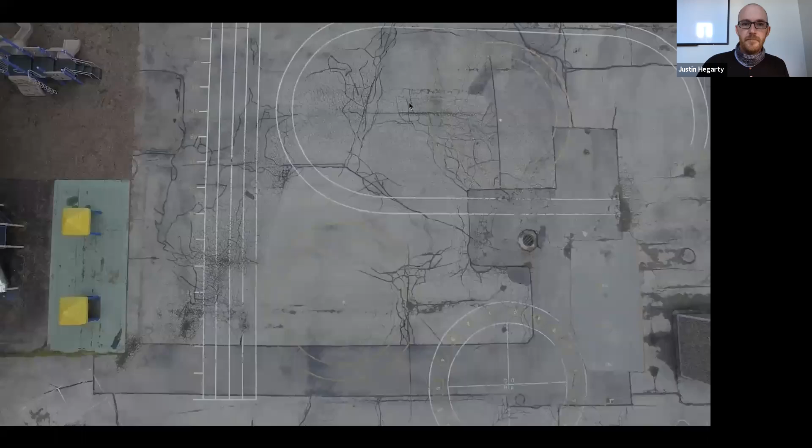Many Milwaukee area schoolyards are in poor condition and offer little, if any, green space. Schoolyards were originally paved to reduce lawn maintenance costs, but decades of inertia have left deteriorating infrastructure that is costly to repair and impairs the environmental health of our city and the social emotional health of our children. The redevelopment process begins with schools applying to receive conceptual planning support provided by Reflo and the Milwaukee Metropolitan Sewerage District. Each year, 5 schools are awarded the planning grant based on their need and enthusiasm for a greener, healthier schoolyard. The year-long planning process consists of monthly Green Team meetings that culminate in the development of a conceptual plan document well supported by the school community, administration, and project partners.

Schools spent over a year fundraising with support from the school district, project partners, and community. School districts hire engineering consultants to create the necessary detailed designs before construction can begin in the summer of the third year of the process.

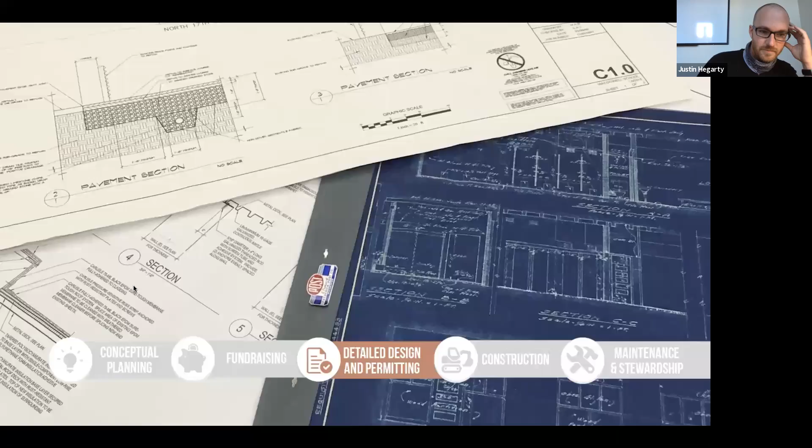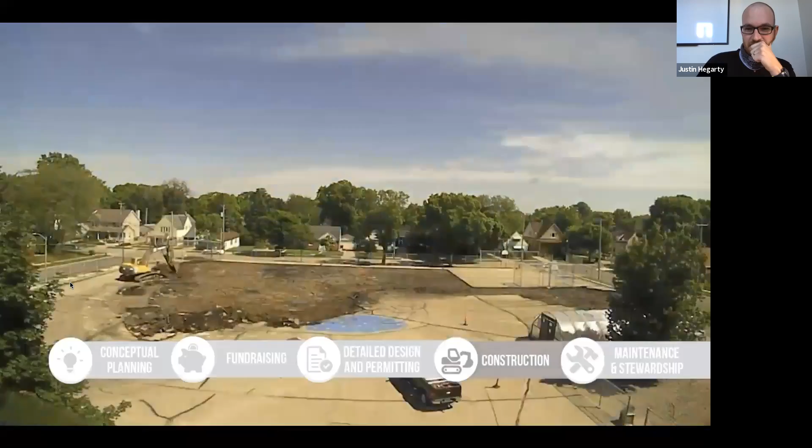I am not going to litter because water carries trash down hills into the river or lake. I'm going to remind my family that our choices affect more than just ourselves. Everything is connected.

These projects don't only help our schools receive a new and better playground, they're also helping the environment and making a positive change in our community.

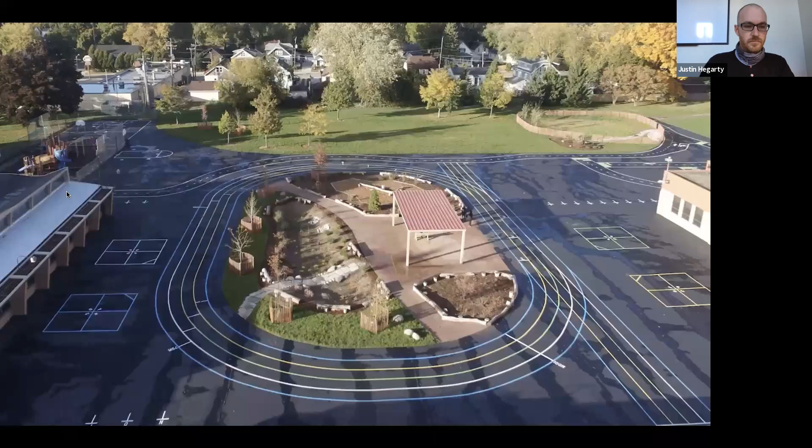An increasing body of research underscores that students' access to green schoolyards can result in better academic outcomes, increased engagement and enthusiasm, improved social emotional skills, and decreased childhood obesity. Redeveloped schoolyards also offer many other benefits, including improved stormwater management, urban biodiversity, community engagement, and meaningful STEAM curricular connections.

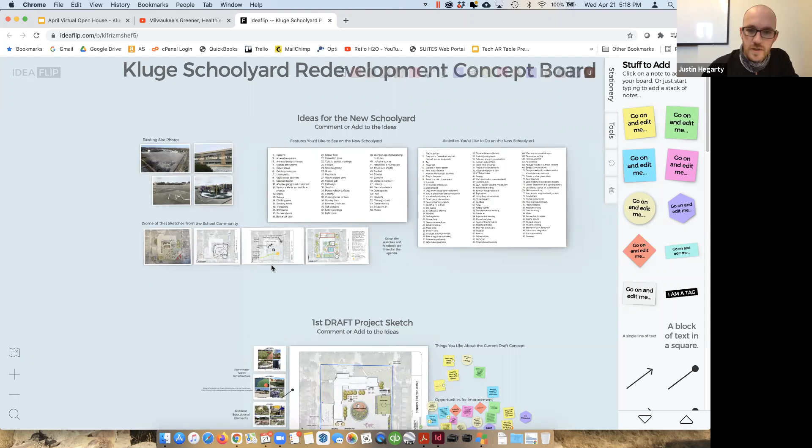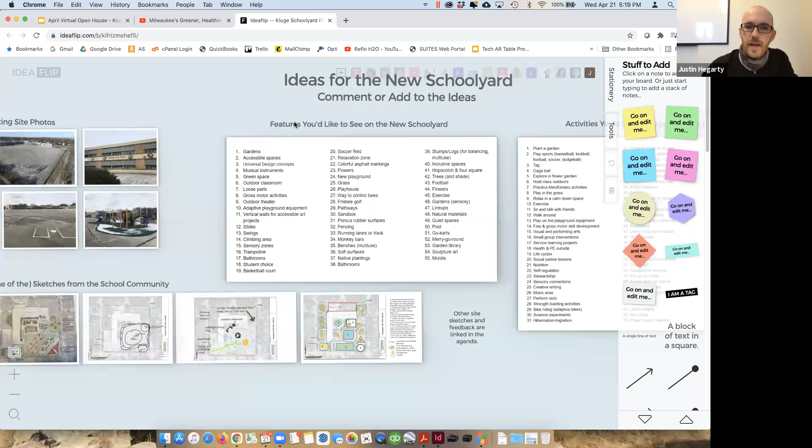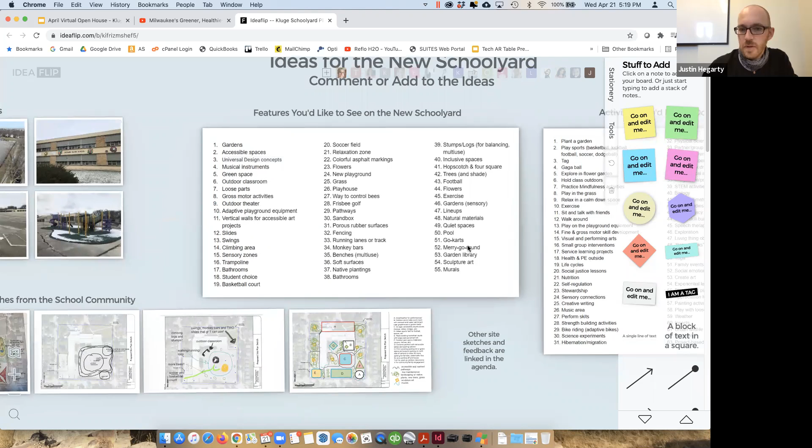Up at the top here, we have what was from the original schoolyard redevelopment surveys. We had asked the Kluge community to communicate what they would like to see on the new schoolyard. There are some really great thoughts about gardens, loose parts, murals. I won't go through all of these, but there are some really great ideas out there.

We also got some solid responses about activities that you'd like to do on the school grounds, and we heard from students and adults. This is really helpful to help build out what kind of features and what kind of activities we can do to help support what you'd like to see on the school grounds.

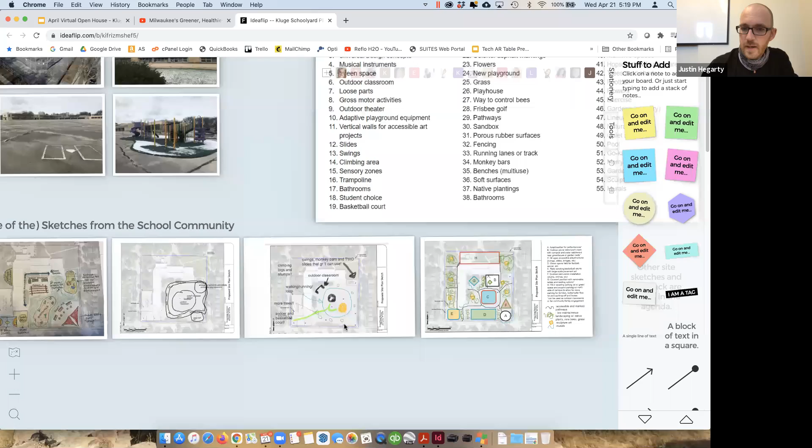So we did that, and we also got some sketches which were really helpful as well. And then for those that were part of the school green team last month, we had a first draft put together. We had some precedents, like images that represent similar concepts, and we got a lot of good feedback on that.

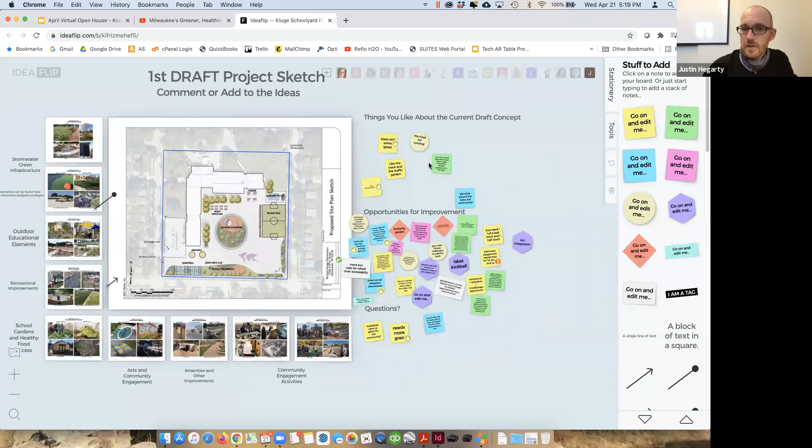And then today we have the second draft. So we took that feedback and we made some revisions over the course of the past month. And today we want to just take a look at what that plan is saying.

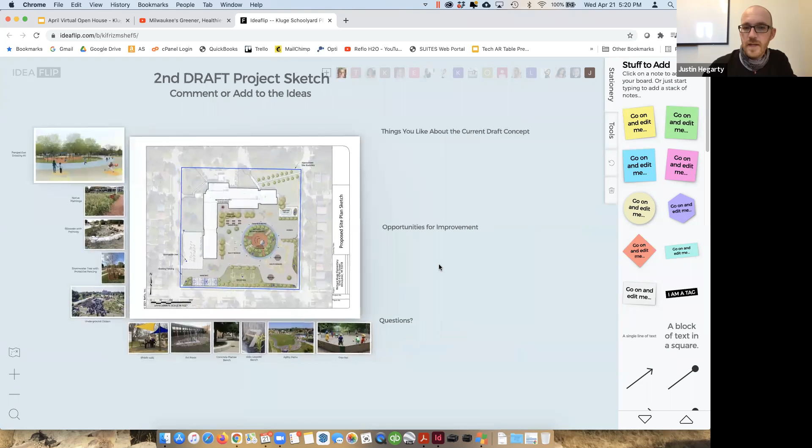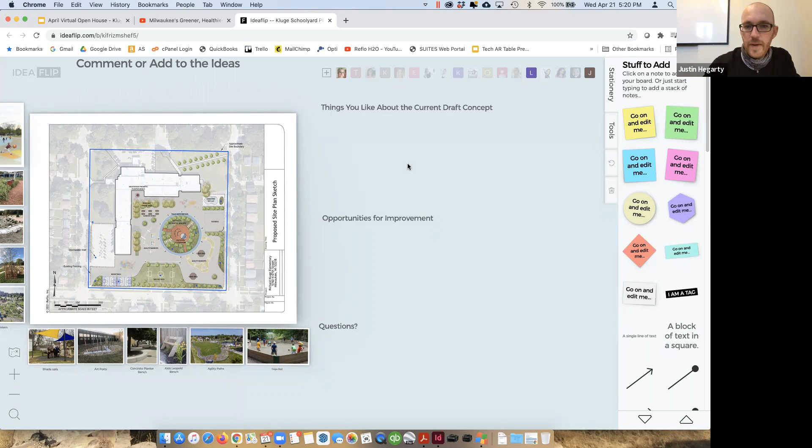And then we're going to go through the same prompts. I'll come back to these, but I just want to introduce them. One, what are the things that we like about the current plan? Two, what are the opportunities for improvement? And three, what questions are out there, so that we can work on that and get back if anyone has thoughts or questions about what's going on. But we'll come back to those three prompts in a moment.

Again, Lisa did drop that link in the chat, so if anyone wants to follow along in this platform, you can do that. But I'm going to ask Elise from Community Design Solutions to walk us through some of the updates to the conceptual plan—again, second draft—and we'll go from there.

Yeah, hi everybody. So lots of updates have been made. Some things have been moved around, but some things have stayed the same, like that center track circle classroom area. But now it's been a little bit more detailed and designed as well.

So we've got lots of space for an outdoor classroom with shading, trees all around it, an additional art post and decorative benches into that grass area to the north, so you can spill out seating as well, and have other little areas for interaction and hanging out within this center space. Trees are all around it, and we've got a track with meters going around it as well.

And then to the left and right, we've extended out some agility markers, similar to the ones we saw from last time we met, copying that same style and creating more ways to wind through the space, with gaga ball pits to the right. Another major move was switching the kickball soccer field area—I know it used to be more to the north, but we've positioned it more to the south. Again, lots of trees surrounding it, with bioswales to the right.

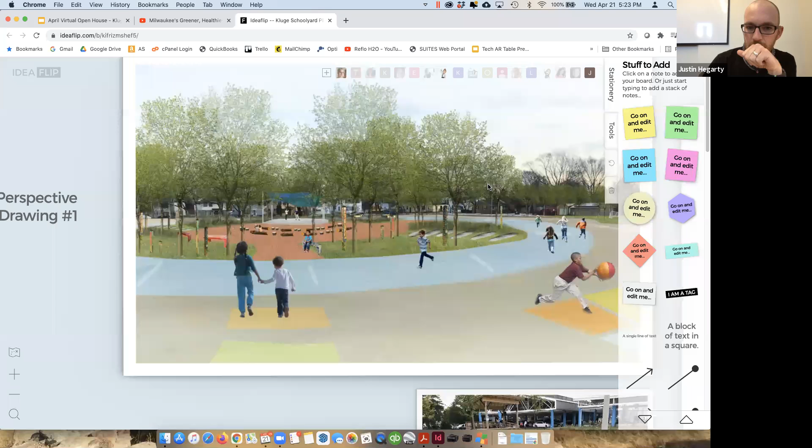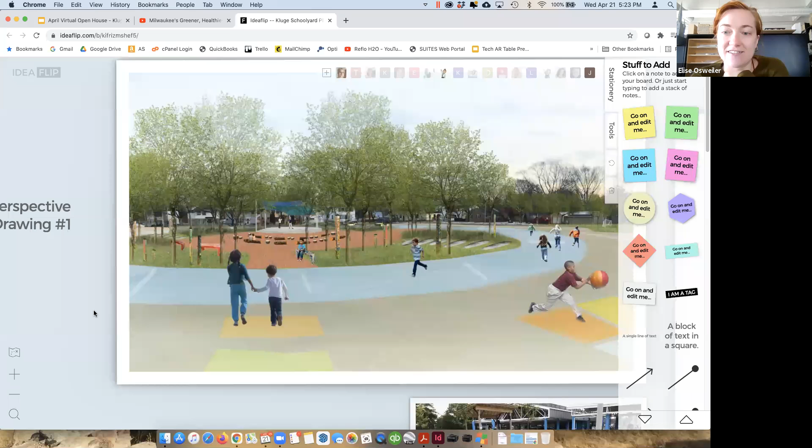This is a first perspective drawing of that center outdoor classroom space. You're positioned on some of these agility paths looking directly into the space, the path that you would take, or one of many paths into the center space. You can see some of those art posts and benches around as well, log seating for the theater space with lots of shading and trees. There's some children playing to the right, and you can see the soccer fields and Gaga ball pits way in the distance.

So as Justin said, there'll be multiple renderings so we can highlight different spaces throughout. I think another good conversation point is what other spaces do you want to see rendered out and have more detail.

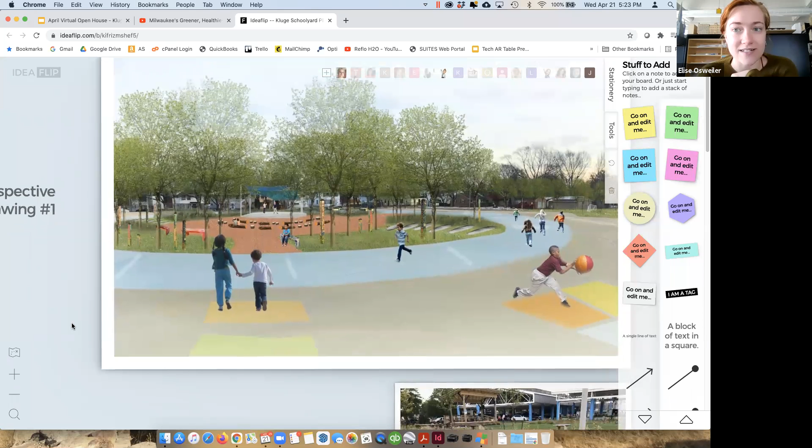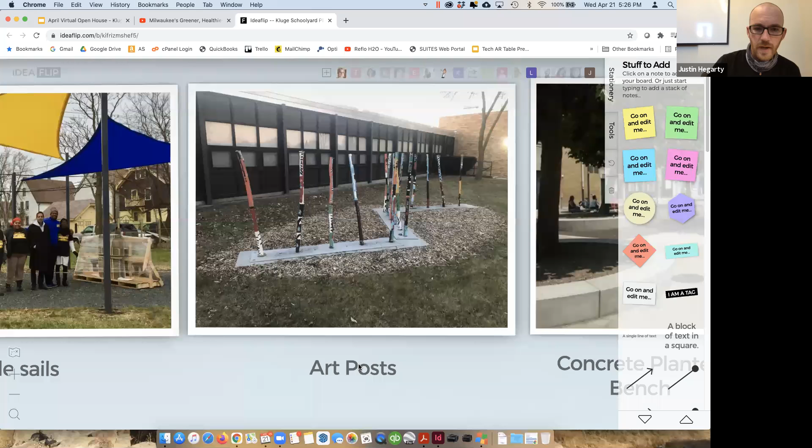Elise mentioned art posts. This is an example from the Academy of Accelerated Learning that serves as an opportunity to have decorative posts. It could be different features if we want to explore different sculptural elements or types of arts programming. We can certainly talk about that and include it in the plans as well. We want to make sure we're representing Kluge appropriately as a school for the arts, so we felt this could be a cool visual opportunity to accent the outdoor classroom area.

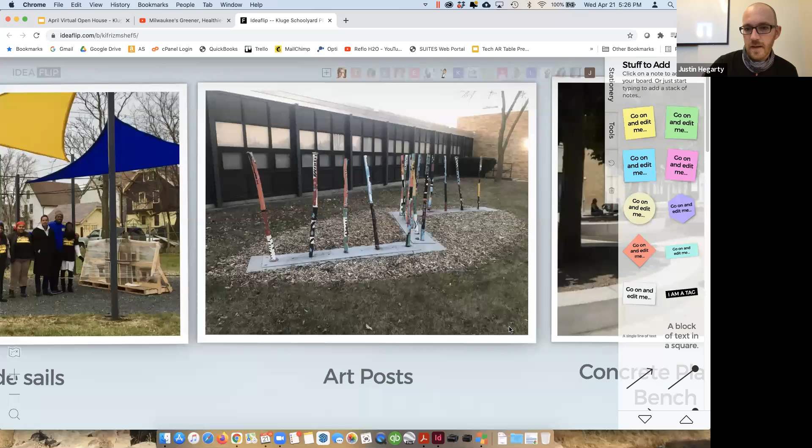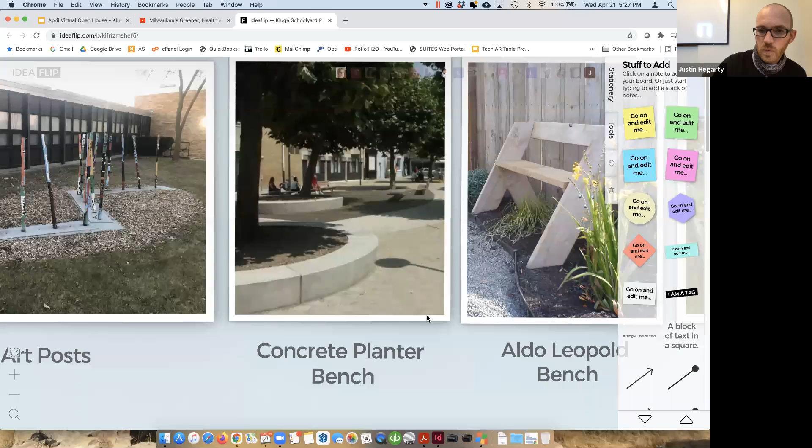And then we have these circular features that we're calling the concrete planter benches. These are opportunities to have benches on the school grounds that are really resilient and also act as a planter. What we're talking about with schools is also using this as an exhibit space, so maybe art activities can be planted, so to speak, inside of there. Different types of grasses could be planted underneath that canopy as well, but that's a strong visual.

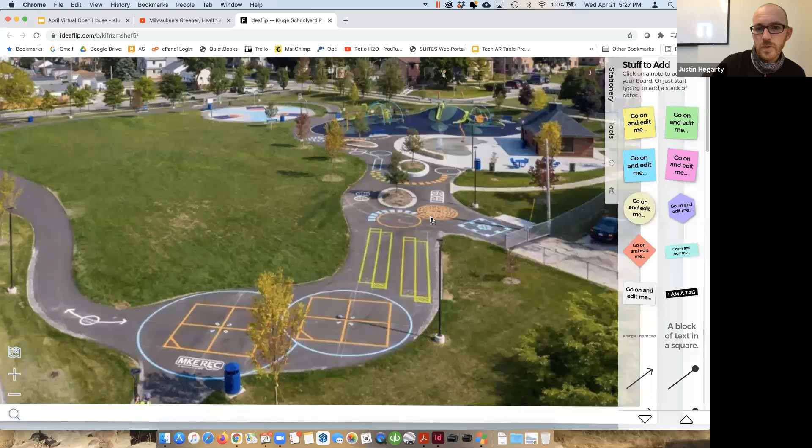Benches, and then I do want to zoom into the agility pathways as well. So when we do this, this is an example from MKE Rec.

There's opportunity for painted play that says hop, skip, and jump through different spaces. It's kind of a really intuitive activity for students to be able to play on the school grounds on this painted play. The sensory gardens, I see that in the chat.

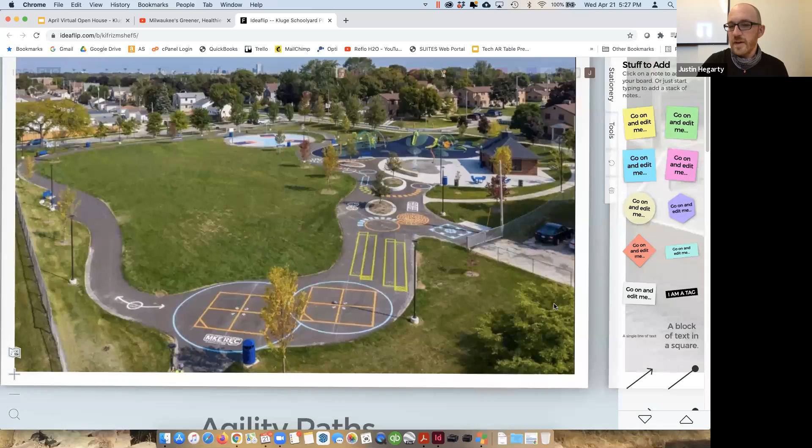We'll come back up to that one too. Gaga Ball, for those that aren't familiar, this is kind of a smaller scale dodgeball facility that helps support some gross motor activity that's a little less intensive than dodgeball, a little bit more inclusive. It's really popular amongst many students.

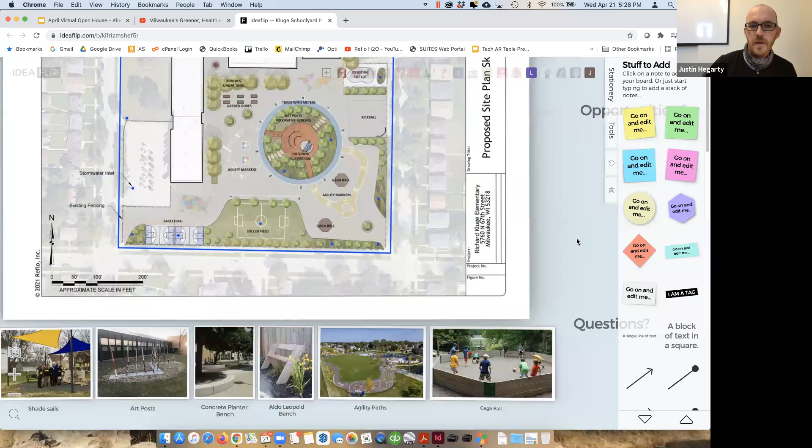Okay, so those are the precedents, those are some of the ideas. That link is in the chat, Lisa, if you wouldn't mind just dropping that one more time. So if anyone wants to respond to these prompts, again, we're looking for what you like about the current plan, what are opportunities for improvement, and what are some questions about that.

I'll show you real quick how to respond to these prompts. Once you get into it, on the right-hand side, there's stationery. If I just left click and drag these sticky notes, I can drag them into one of those three prompts, and I can double click it and then type in there and say, what do I like? I like the bioswales.

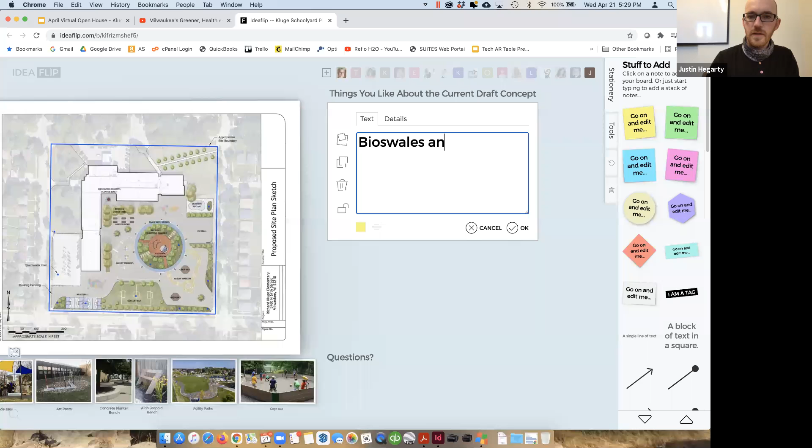Bioswales and walking paths. So one thing I'll say is in the details, we can see who made those comments. So if there are any questions, we can follow up appropriately with those individuals as well. But there it goes, and that's one of the ways to be able to respond to this.

The colors aren't going to matter for our purposes today, so you can get as creative as you'd like with whatever color post-it note.

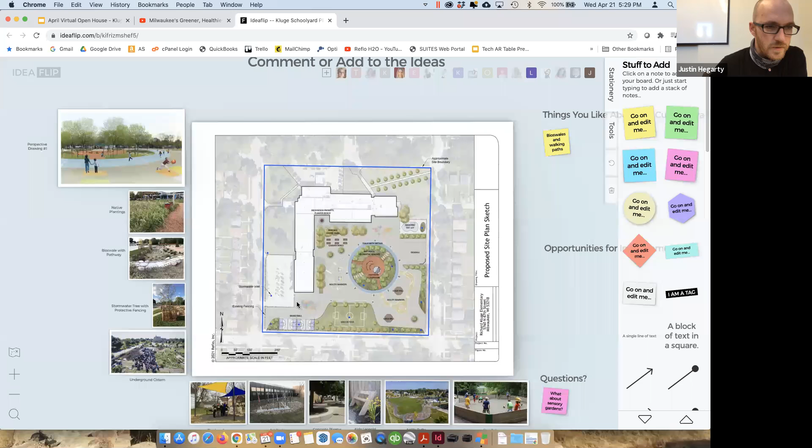And so Elise, would you want to respond to some of the sensory activities and some of the sensory play areas? I know we had talked about this corner in particular.

Yeah, so that back corner, I think, is another opportunity of where we talked about, because it is kind of a little bit more tucked away. It can create that meditation prompt, kind of that sensory activity. I think that, and all along where the garden boxes are in that whole space, could easily be turned into a really nice sensory garden, and places where you can walk and have that more mindful space. And then I also know we talked about if there were any more sensory activities that could happen back there.

I know other schools have talked about options as well, Justin, like lavender gardens, I think was one, if that's kind of what we're thinking about.

Yep, lavender. Some have done like painted on the asphalt labyrinths. Labyrinths are not mazes, they're like one way in and one way out, so you follow that pathway. That can be painted on the asphalt, or that could be built above it through different means as well, so if a labyrinth is of interest.

I also want to say that what's shown here in crushed red granite, that is all wheelchair accessible pathways. Also that kind of stage area for the outdoor classroom, we want to make sure that shows as having a ramp, so that would all be wheelchair accessible as well.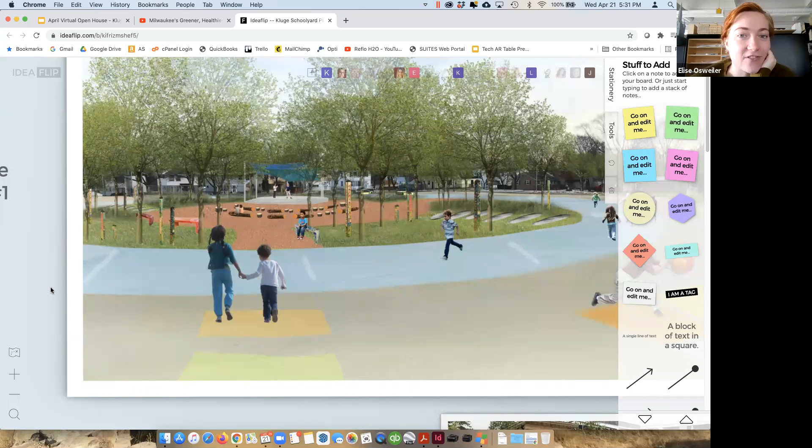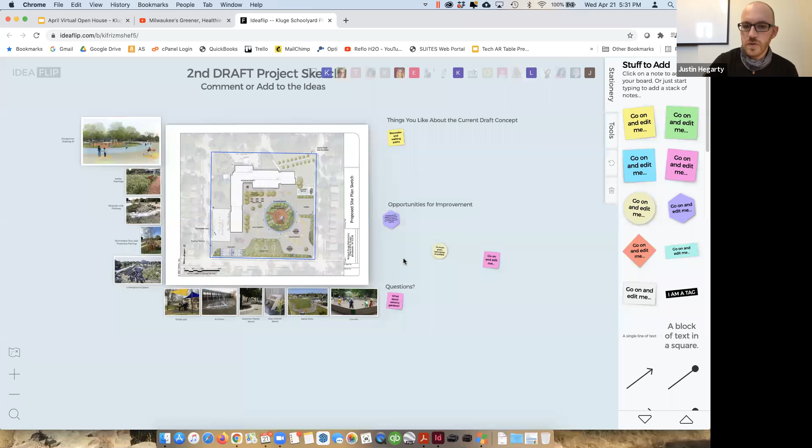Let's see some comments in the chat. And then we see some people populating the prompts here too. Any big thoughts that we want to chime in and just kind of hear those out with the big group? Does anyone want to unmute and just make some comments while others are responding via the board?

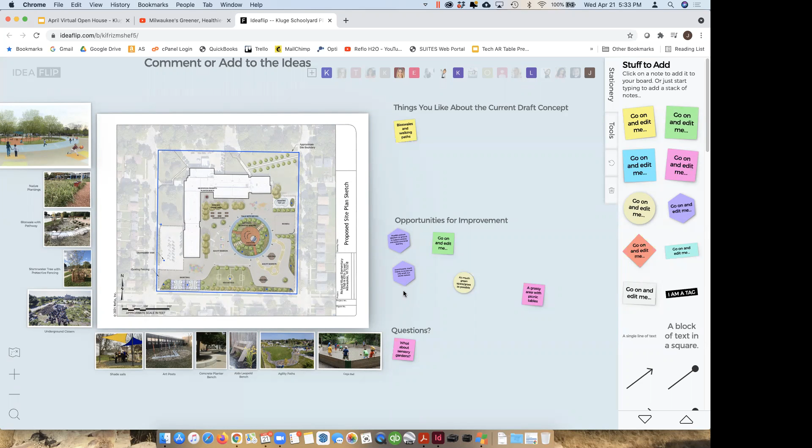I was just wondering if any trees are going to be added along the edging, maybe native pollinating trees that would bring some shade, but also by production have blooms and flowers, which would be another way to bring in butterflies, bees, and natural pollinators.

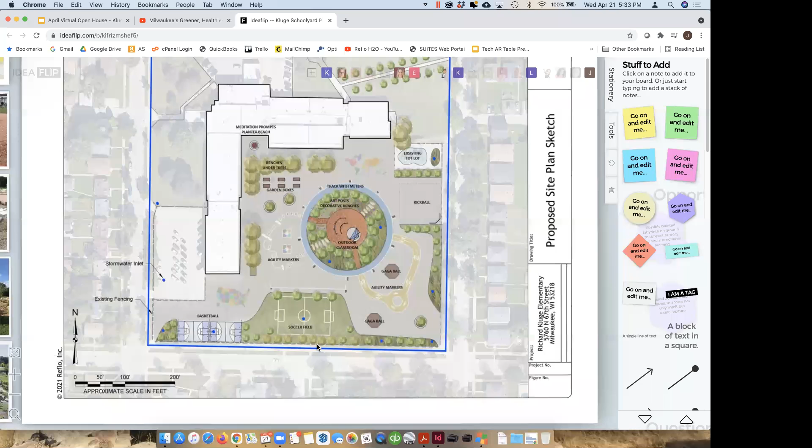Yeah, that's awesome. So Angeline Koch, who is the MPS sustainability specialist, is the project manager within MPS facilities that manages this project and the school projects. She's also a master gardener, and I think she'd have similar comments and ideas.

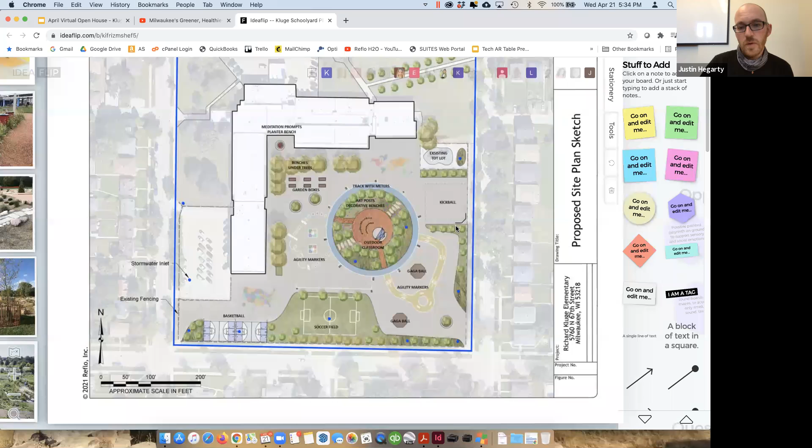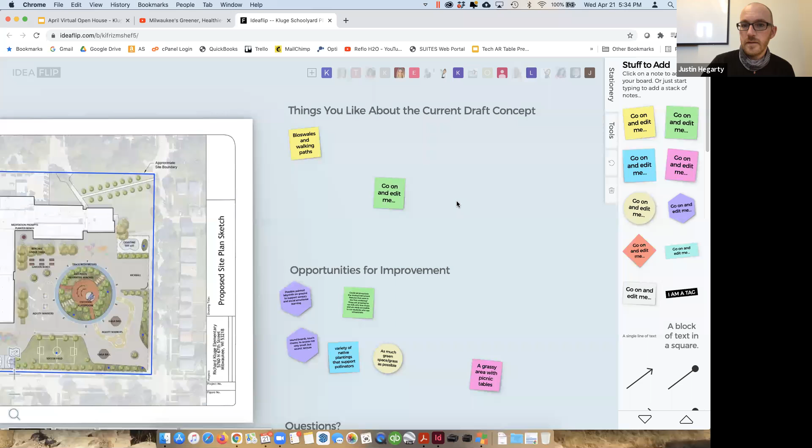And you guys were talking about planting a lot of different trees, so there's a lot of opportunity to explore different types of flowering trees. Some fruit bearing trees - on schools we've been a little more sensitive about making sure those are in corners or areas that can be separated from the rest of the space in case of allergies, like service berries in some cases. But if there's interest in exploring diversity in trees, I think that would be great to comment on, so we can provide more explanation of the opportunities on that front.

Sorry, I was having a little hard time with my sticky note. Do you want me to add it on there for you? That'd be great, if you wouldn't mind, that'd be awesome.

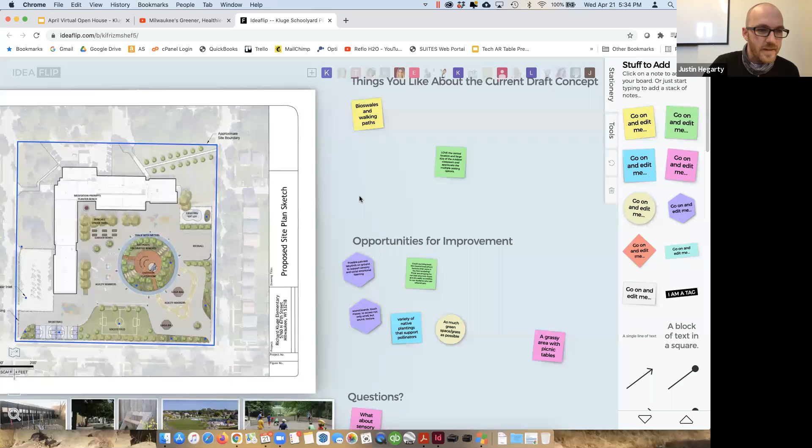Anyone else want to chime in and provide feedback on what we're looking at? In the chat, we're talking about different kinds of activity and sensory focused panels, like touch mazes and different tactile things, so there's more than just smells from the plants and flowers, but different sensory connections we can help bring to the students.

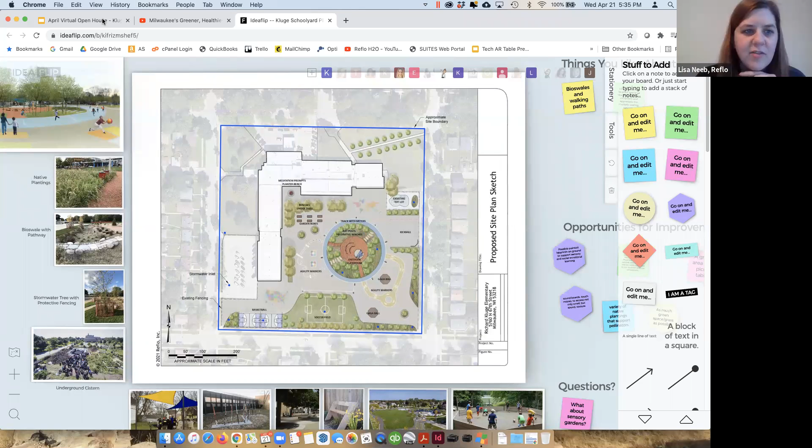Yeah, so for those that aren't familiar, just to describe that more - those are kind of like boards that you move things around, very tactile. I'm curious, from the Kluge team, would you prefer to have those by the younger ones up on the north side of the building, or where would those panels be most appropriate?

I'm going to allow other people to talk. Could that be something that maybe gets integrated into that grassy area just to the south of the tot lot there? Over here? Yeah.

That grass could probably be expanded a little too. I know we've got a little wiggle room with the kickball underneath, so that could become more of an actual usable space too, I think. And as far as the sensory gardens, or whatever you want to call them, they should be accessible to all grade levels, not necessarily by the tot lot though, because all grade levels won't be over there. Got it.

How do we feel about the meditation planter space in the corner? What do we call that, the wind tunnel? Well, that would be great, but it's hotter than heck in there in the summer. Yeah, or in the late afternoon.

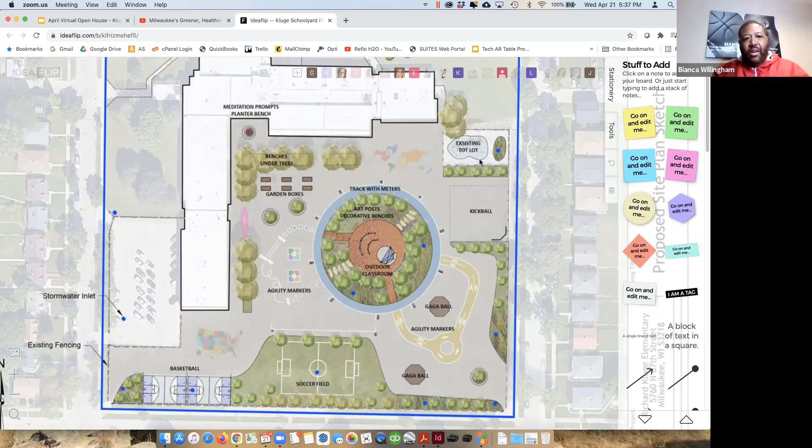So I didn't know - I'm really liking this sketch. It looks like, if I'm looking at it correctly, even the north side of the building was addressed, like on the side closer to, it looks like there were some trees or space planted or added on the north side of the building along Carmen Avenue right there. That path I'm looking at, those aren't there now. And it looks like there's even outside of the eastern door, right above where it says existing tot lot, maybe some trees over there as well, which I really like - as much green space and shrubbery as possible, which will eventually grow large enough to have more shaded area.

And we know that during the summertime for our community members, and even during the school year, the kids are constantly trying to escape sometimes the beating sun or whatnot. Yeah, and I'm sure the community members who walk in the neighborhood would enjoy that too. That's why those planter spaces with the seating is very important as well. So I like those ideas a lot.

Yeah, I'm glad you mentioned this one. So this pathway, if there's interest in gardening and orchards, in this case, fruit bearing trees, we've tried to put in certain areas of the schoolyard or certain schools. If appropriate, we could call out these trees as fruit bearing, and this could become more of an orchard as you walk through. It's not appropriate for every school, but some schools really like that idea. We just planted a 30 tree orchard at Vincent this last fall. Different program, but if there's interest, that could serve as a nice opportunity.

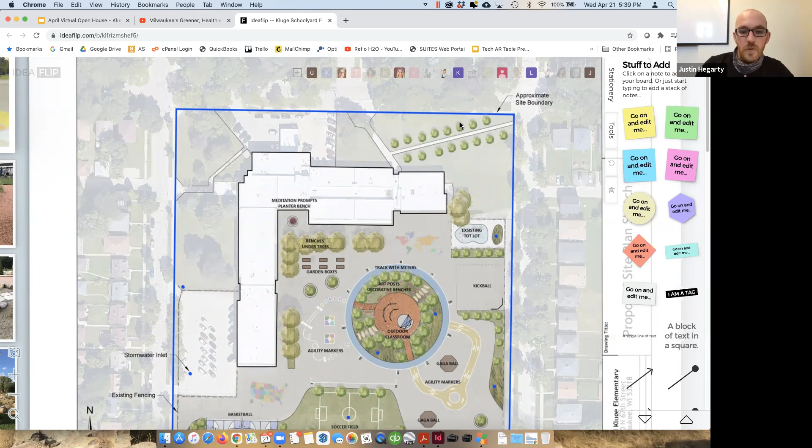Alternatively, it could be really great seeing the different types of flowering trees that come through here as well. It would be helpful to get some feedback on what you'd like to see if we were to plant trees. There are different options, especially for this area here.

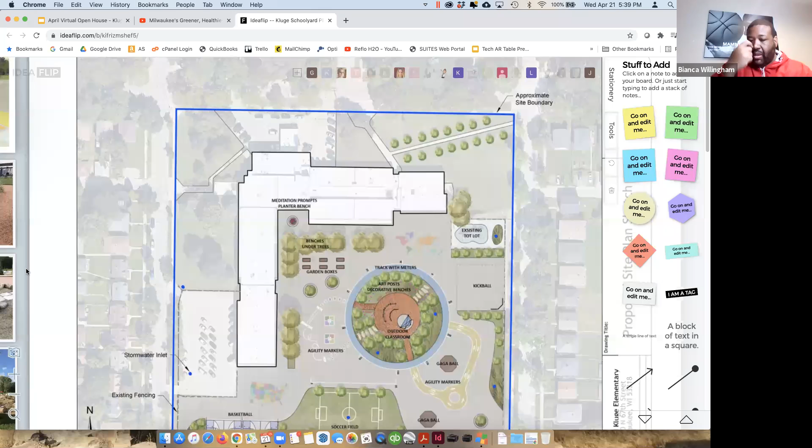I was going to say, what do you guys run up against with other schools regarding this green space? I think someone, I think Ms. C, made a really good point about many things needing constant attention throughout the seasons. I'm pretty sure a lot of this stuff would be perennials that grow on their own, but some things require consistent watering, like the garden. What have other schools, cohort 1, cohort 2, run up against in maintaining those types of spaces, dealing with the confines that we're dealing with? It's not like we have a lot of readily available water hoses and things of that nature. Maybe we can petition our district to give us those things because of this.

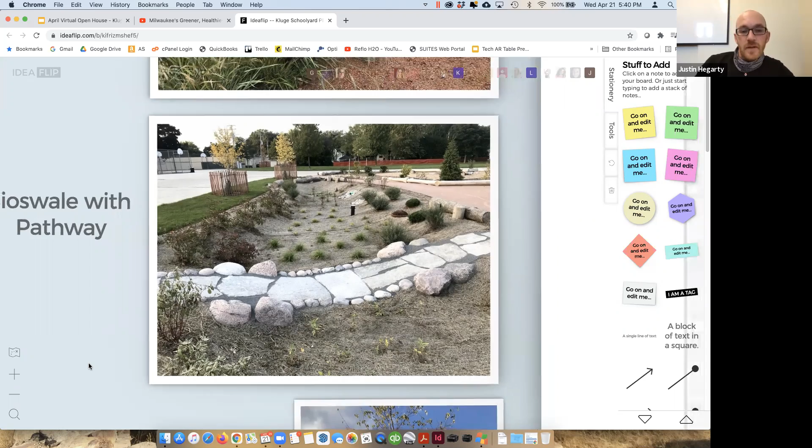So a couple things on that. The nice thing about native plantings is that they're native to Wisconsin and used to our climate, including periods of drought. So once established, they can last longer, and theoretically we don't necessarily have to water them. I do want to underscore that they need to become established first. This bioswale picture is a good example - these are all plugs, shortly after being put into the ground. For the first 2-3 years, they're going to need a little more watering, a little more care, but after those 3 years, they're native and take care of themselves.

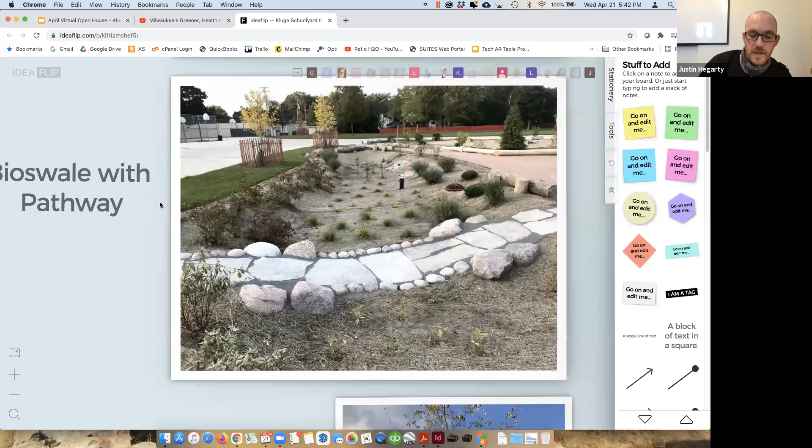For cohort 1 and cohort 2, because of the pandemic, Reflo has stepped in to help schools weed the spaces. That's really the big one. As you can see between these plugs there's a lot of ground, and taking care of those weeds for the first couple years is really important so weeds don't take over the whole space. With our native species, for the first 2-3 years they're growing down into the soil so they have access to water sources in the long run, so we don't have to keep adding water to the top because they have deeper root systems. With weeds it's the opposite - they have shallower root systems but grow up and consume the space. So Reflo stepped in during the pandemic to help weed a lot of the green spaces for schools, because school green teams haven't been able to take that on.

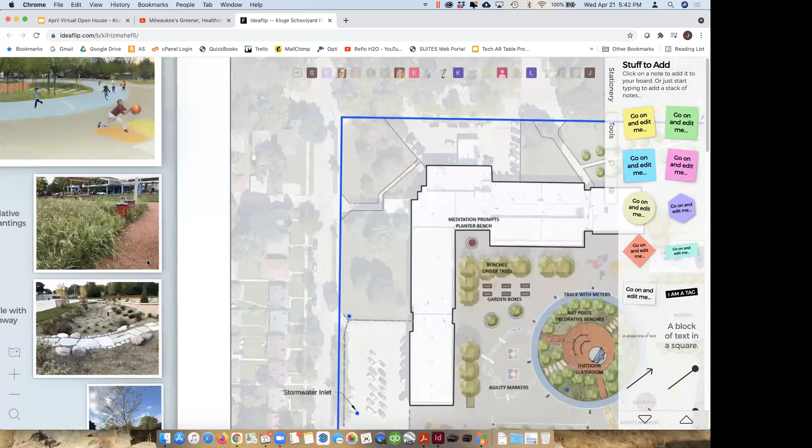Can I ask another question? What have the other partnerships done regarding maintenance of mulch? Has any of them ever done mulch? That's a maintenance thing - it's a good thing, but it's a maintenance thing. Have any of the other organizations done wood mulch, or do they prefer natural grasses and things that fill in and minimize the weeds, so maybe they don't need mulch?

Yeah, so mulch is appropriate. Here, let's see.

I just know it's maintenance, yeah, yep.

Definitely put mulch around the base of these newly planted trees. The benefits of mulch are that it helps retain moisture at the surface and reduces the watering need because it's retaining more moisture. With that being said, it deteriorates over time and needs to be replenished maybe every year, maybe every other year. So we don't end up putting a lot of mulch throughout the school grounds.

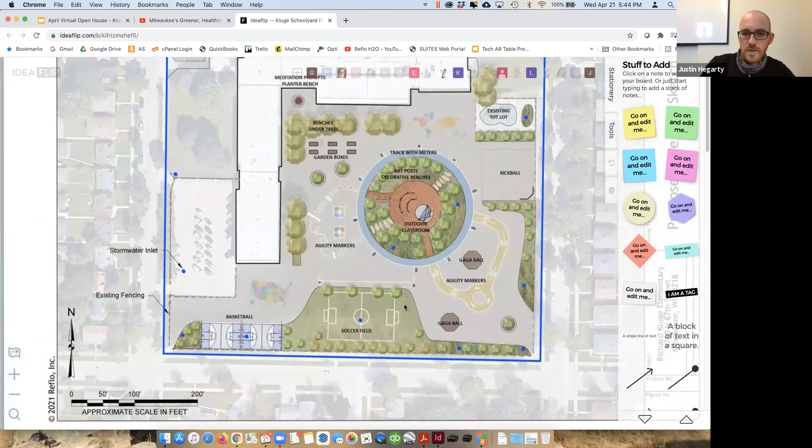The other type of wood-like ground cover is engineered wood fiber, or EWF for short. You see that underneath tot lots and different spaces. It's a higher grade of wood chip that doesn't necessarily splinter when kids fall on it. Both engineered wood fiber and mulch have to be replenished over time. As these trees mature, the grass can get closer and closer to the base of the tree. In this case, we're not calling for a lot of mulch throughout the school grounds—some spaces have mulch or engineered wood fiber areas, but we're not showing a lot of that here.

So I'm guessing that will limit in some capacity our ability to diversify those native plants, because we want the super heat-hardy ones.

Well, if there's interest in having a nice wide diversity of plantings, the trade-off is you have to have a better understanding of what is a weed and what isn't. I think of it as a spectrum. Some schools are on one side where they want a low maintenance scheme that's really easy—maybe 10 to 15 different types of native plantings, which is easy to maintain because you can just learn those. On the other side, we've had schools with far more than 30 different types of plantings, so you walk through and have a great deal of diversity. The caveat is that maintaining it can become difficult to tell what's a weed and what isn't, because of how complex it gets.

It totally depends on the school's green team and their willingness to support the new green space.

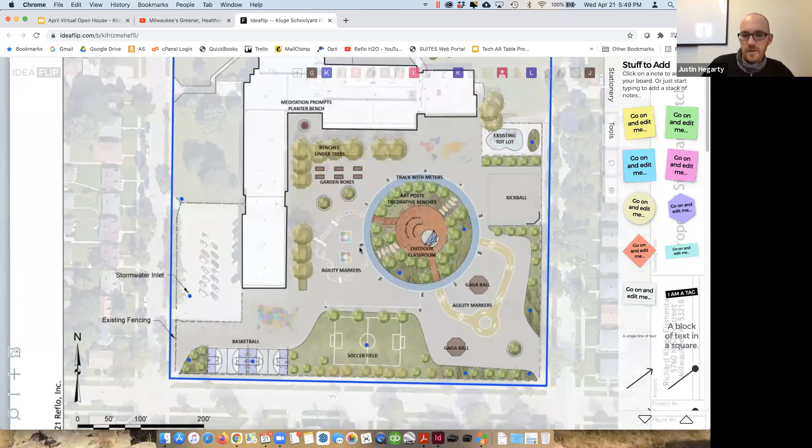35 students, I think is great. So yeah, the scale of this is pretty large. It's a pretty big space.

Okay, other things I thought about: the basketball. We're showing 2 full courts. Does that still sound appropriate? Other alternatives could be 1 full court and 1 half court, if it makes sense to reduce.

Some schools talk about having one of the half courts be a shorter hoop for younger kids. The trade-off is we've heard from schools that have that, and it becomes kind of like a dunking contest after school hours. So talking about how those hoops could be removed as appropriate, but I just wanted to push on the basketball question. What are we thinking about what we're showing here?

Yeah, I like the idea of a shorter one, and basketball courts as they stand now are able to be removed, I think, by the engineers of school buildings. So the dunking one, the one that I'd be able to dunk on, would definitely need to come up. But I do like the idea, I didn't even think about having a smaller court so younger kids can enjoy it. I know normally kids 3rd grade and under in leagues play on 8-foot rims and lower, so that makes a lot of sense.

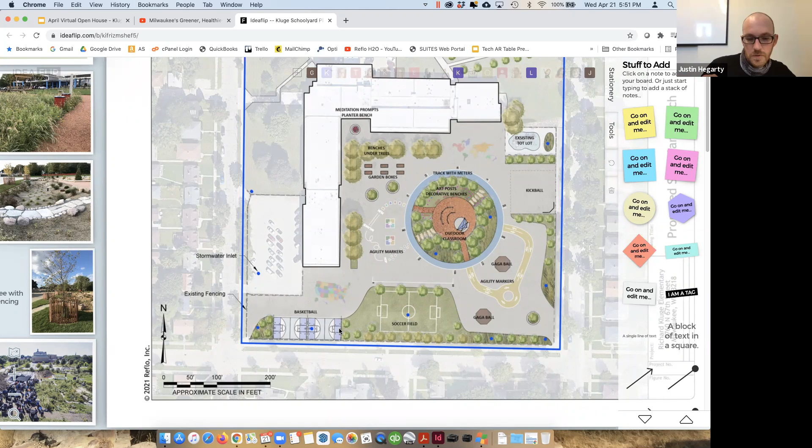And obviously it reaches more students in our school building. So are we thinking 1 full court with regular hoops and 1 full court with shorter hoops, or a half court with shorter hoops? I think last time we talked, we only talked about having 1 full court and a half court. So there was no need for 2 full courts, but if we're not putting anything else in that space, then I'd say we only need a half court. I was actually just recommended that we move the Gaga ball.

That is... alright, so my dog just got the zoomies.

It's crazy. We move the Gaga ball that's furthest south, at the bottom of the screen, closer west, to the left, going up toward the basketball court area, maybe on the opposite side. Because as it stands, further south, that's a good distance away from the building, and we want to focus those school activities a little bit closer. So if we don't use 2 full courts, that would be the ideal place to put the second Gaga ball court.

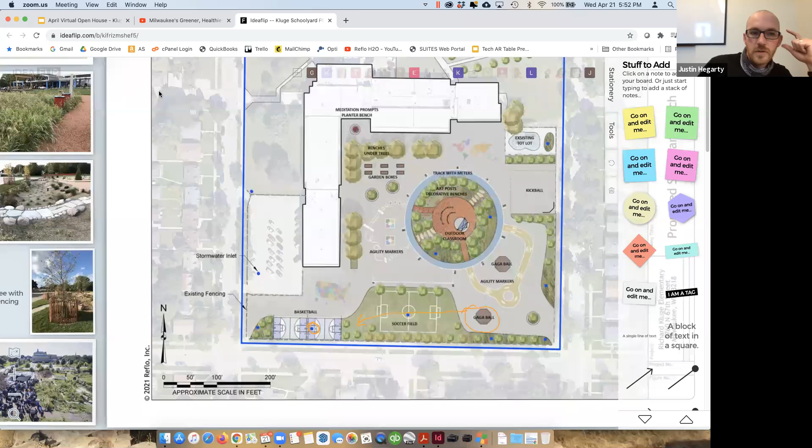Okay, so it would actually go in that area. Yeah, I like that, because that blue dot represents a stormwater inlet, so that's kind of a rough hoop location too. So we put Gaga ball on half that court, and the other half—I saw in the comments too—maybe it's an adjustable hoop, so it can go either way, short and tall. Okay, I like that, we'll modify that. If there are any more comments, please put those in the chat or in the opportunities for improvement.

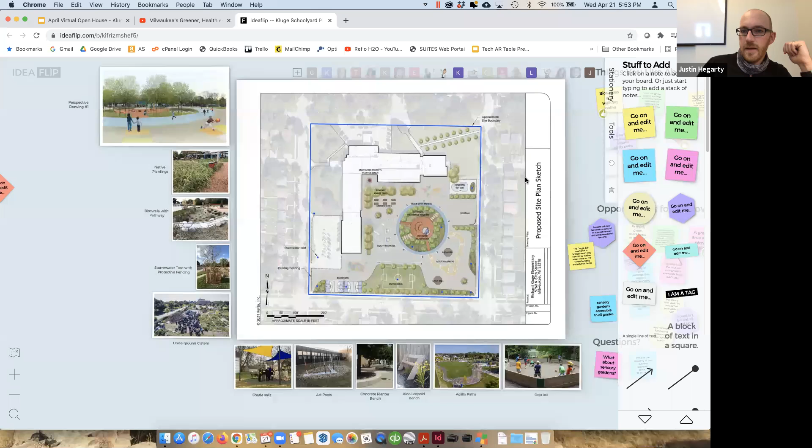So we have just a handful of moments left. In the last 5 minutes, I want to walk through next steps and other ways to provide feedback on this. Is there anything else we want to make sure is heard during this meeting for the updates to the plan?

I just want to be sure it was said, because I read it in some places. Someone made a suggestion, actually two suggestions, and I want to talk this out with people and see their thoughts. Somebody made a suggestion about picnic tables outside or whatnot.

If there's some space, maybe the outdoor classroom area or the bench space can serve as a place where people sit down, rest, and eat. I don't know if it's necessary to have a picnic table, but as long as we have some space to sit and enjoy a meal or snack, that would be good. We also want to make sure we have areas for garbage cans out there.

The second thing someone mentioned was about swings when we do tot lots. Last time we talked about a tot lot, possibly even two, because older kids like to play on the tot lots as well. When I say older kids, I'm talking about kids above kindergarten age.

Primarily, if it's near our kindergarten area, we want to make sure we have either equipment that can be used by older kids, or it may become more expensive to put an additional space on the other side of the playground. But someone did mention swings, good old fashioned swings — something to be said about kicking your legs out and going high into the air.

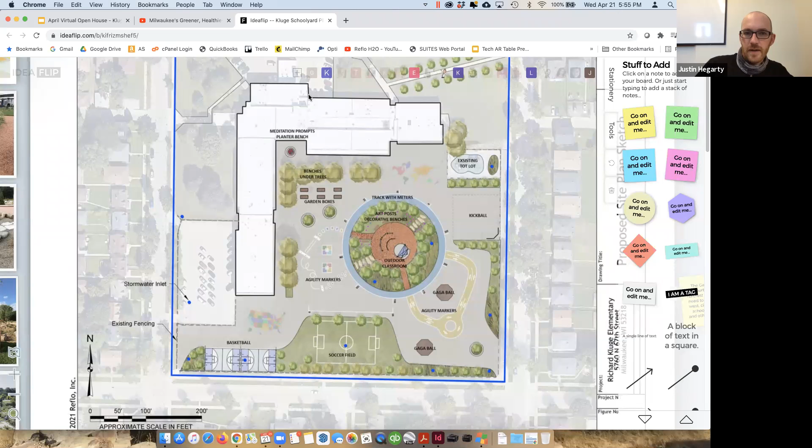But I also hear gross motor climbing activities — I see in the chat, rock walls, that kind of stuff for older kids, right? Yeah, definitely. And then where would some of that go? I know we're talking younger kids on the north side — where would the gross motor area for older kids go?

By soccer down here — could we eliminate the kickball field? Obviously teachers should chime in here, you're out there a lot more than I am at recess, but I don't generally see it being used for actual kickball. If we had the opportunity to extend the tot lot, would that be an option?

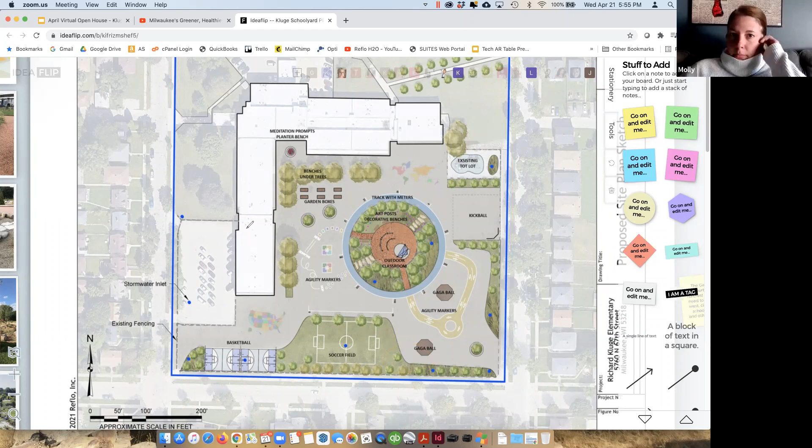I think we might want to keep the field, whether it's for kickball, soccer, or whatever they want to use it for. I think just having that field area is going to be necessary. No, Morris, I think she's talking about the area on the sketch where it says kickball, where it's not an actual field, it's still cement. Oh okay, I have to look carefully because I thought that was the field.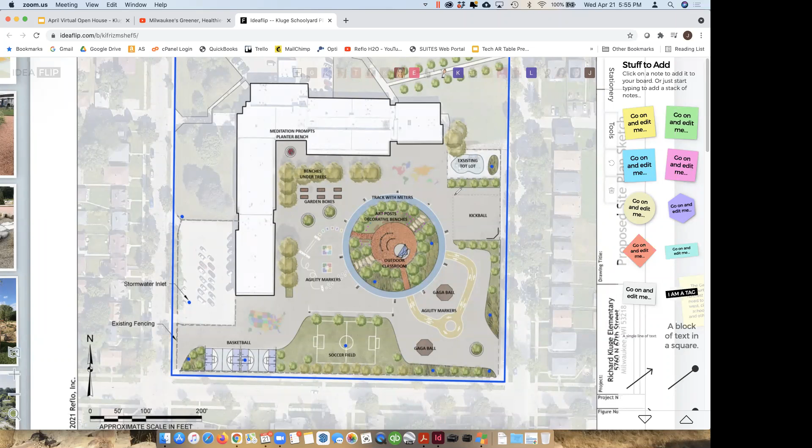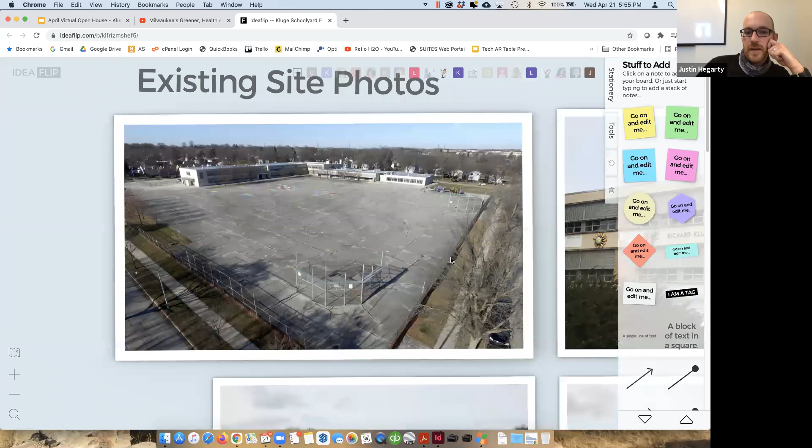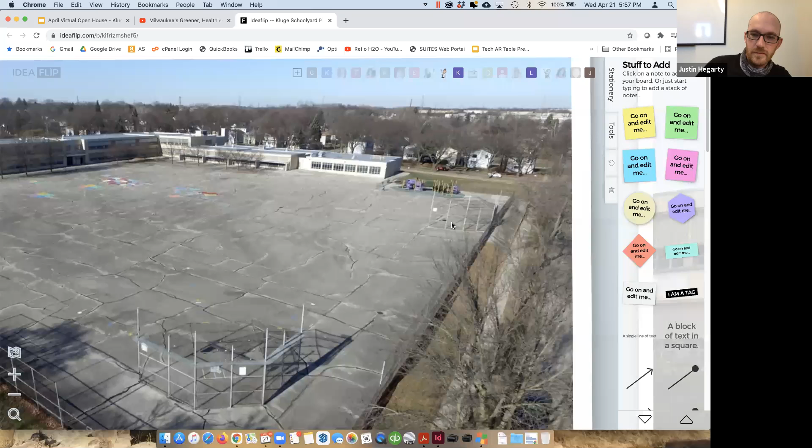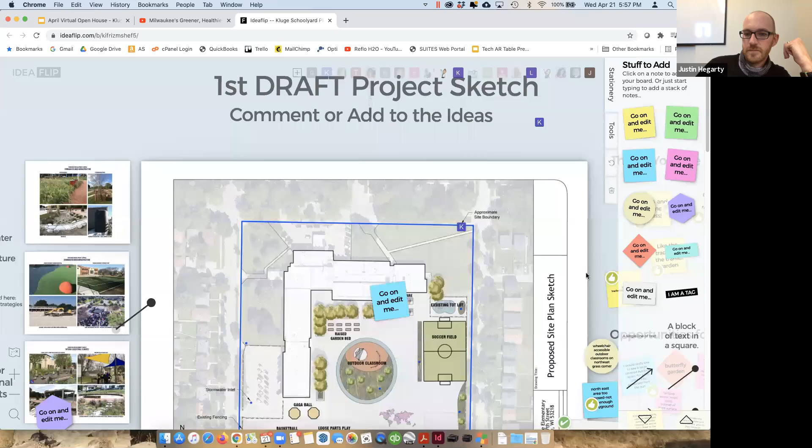So where's a good spot? Sorry — so that's the place where the artificial turf was going to be, right? Right now you have one kickball field here to the far southeast, and then this kickball field, which is already existing — I should say asphalt rather than field. What we're showing in the conceptual plan is that it would largely stay the same, kickball on asphalt. Let me zoom out here. So right here, we're showing kickball on asphalt.

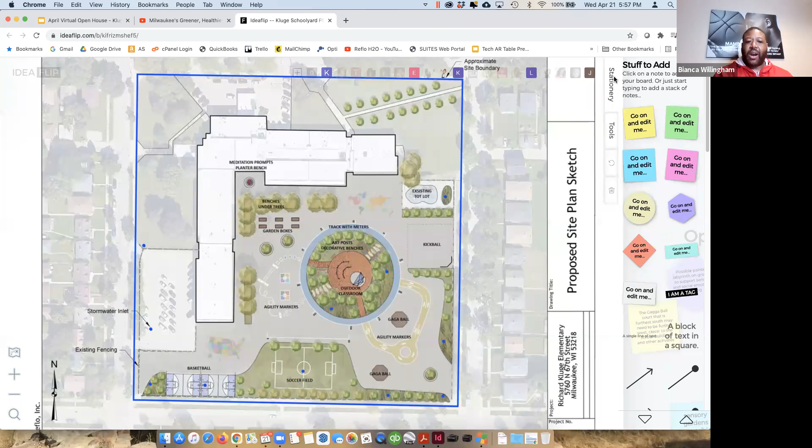I would think if we were to add an additional area, it might be just a little bit to the east of the soccer field, like maybe where that grassy area is, in between the soccer field and where the Gaga ball proposition may be. So right there in that green space, yeah, if this was for older kids, gross motor activities, climbing and the like.

And we're saying we do want to keep the kickball, how we're showing it up here. Yeah, we can't have everything, I guess. Or maybe we can.

And then we do want to talk about expanding, or at least providing more space for the tot lot. If that expands out this way somewhat, maybe it bumps out further as well.